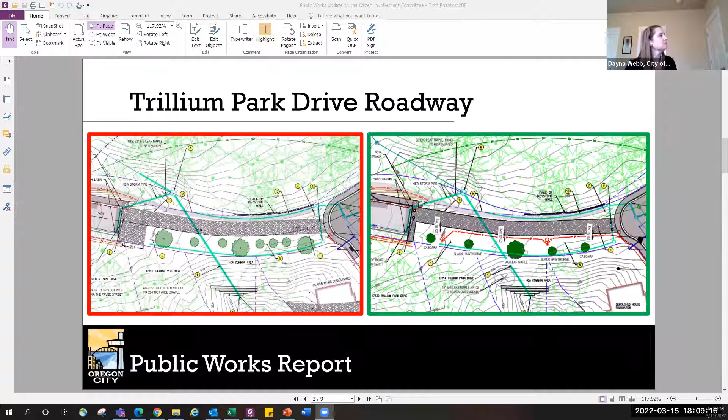From a visual perspective, on the left was the original drawing, and on the right is the updated one. You can see the street lighting here, trees pulled further back, so there's a more clear visual path so you can see what's out there. I'm summarizing - I haven't been the one working with the neighborhood on this, but I believe they had some concerns with dense shrubbery from a wildlife perspective, maybe coyotes in this area. So we're pulling those back, and this is the turnaround - just a little bit less dense on the plantings in that area. Again, trees pulled back behind the lighting. So just some small things, but I believe John has been working with the neighbors on these, getting to where everybody feels comfortable with this layout.

And that is all I have on Trillium.

Ray's got a question. Go ahead, Ray. I'm curious about the bollards I'm seeing in the pictures. Are they wide enough for a bike or a cargo bike to fit through there? What's the spacing for the bollards?

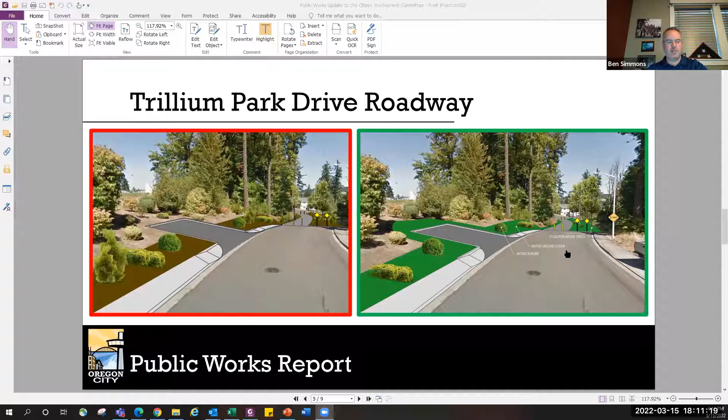All right, I think we're on to Frontier Parkway. Is that still you, Dayna, or is that somebody else presenting? That's going to be me. Dayna is more than welcome to chime in if I miss anything.

Folks, there's really not a lot to update. I'm going to share my screen real quick here. So myself and John Lewis met with Matt Dale.

Some of you might be familiar with Matt. He's attended a couple of the TAC meetings before on behalf of the neighborhood of Frontier Parkway in that area. Since he had last attended a TAC meeting, we were able to do some speed counts.

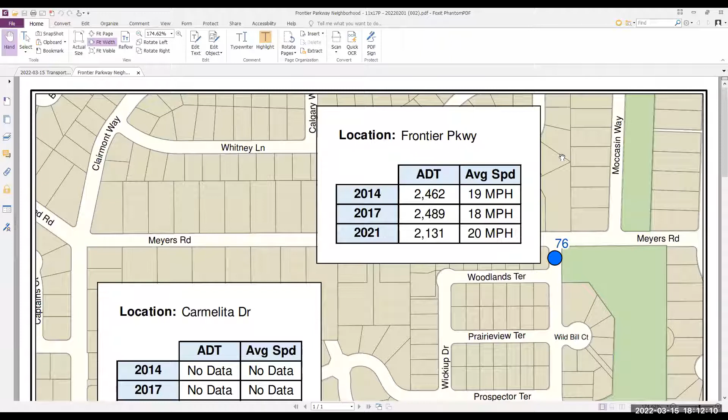Can everybody see my screen okay? So as you can see, here's Myers Road, and this is Frontier Parkway going north-south. Historically, what our data has shown, and currently as of 2021, there really does not seem to be a speeding problem through the majority of Frontier Parkway. Here you have one at Carmelita Drive, 22 miles an hour in 2021.

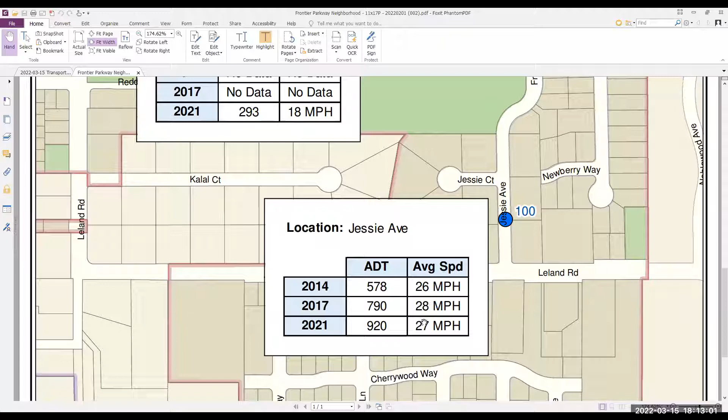If you go south to Silverfox, 18 miles an hour on Silverfox. And then the last data point we gathered was on Jessie Avenue. As you know, Jessie Avenue turns into Frontier Parkway, and right off Leland, we historically have seen speeds just a tick or two over the posted 25-mile-an-hour limit. So generally speaking, we're not seeing a speed issue based on our data.

John and I talked with Matt about different options. There's already speed humps on Frontier. We really collectively didn't think another speed hump would accomplish much. We talked about potentially doing some signage on Frontier at Myers and some signage on Frontier at Leland.

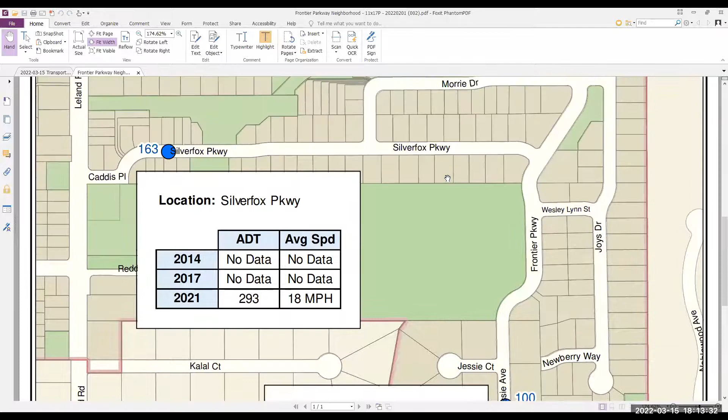We never did come to a determination on what the signage would say, other than potentially, no trucks allowed is one. But in this day and age, with most homes getting deliveries from Amazon and whatnot, we would want to make sure that we weren't putting out a message that those types of vehicles were not allowed to go there.

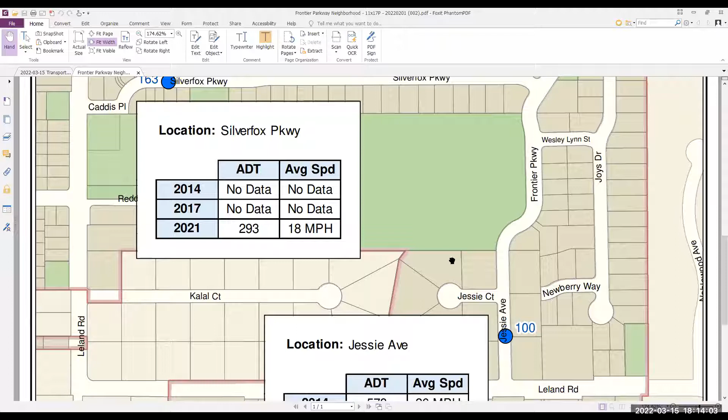We talked about potentially a sign that would say something to the effect of neighborhood traffic only. That's pretty easily done by Jason and his folks here at Oregon City. But frankly, in our discussion with John and Matt Dale, the effectiveness was in question. We just didn't really see where the signs probably would have that much effect.

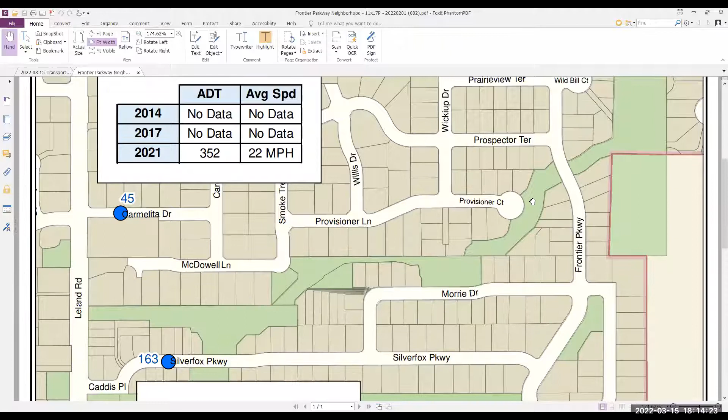John talked with Matt about doing some creative painting in the street. For example, there's a neighborhood, and Dayna and Jason will have to help me out on this, it's the McLaughlin neighborhood. The residents got together and painted an intersection. It's very colorful and kind of neat, and it sort of indicates that, hey, this is somebody's neighborhood.

John thought the thought process was, well, maybe if something like that was done by the neighborhood, it could help. Again, the effectiveness, there'd be no way to really gauge that until after it's done, and then it would be questionable at best. Vance, was the original complaint speeding, or was it trucks, or was it both?

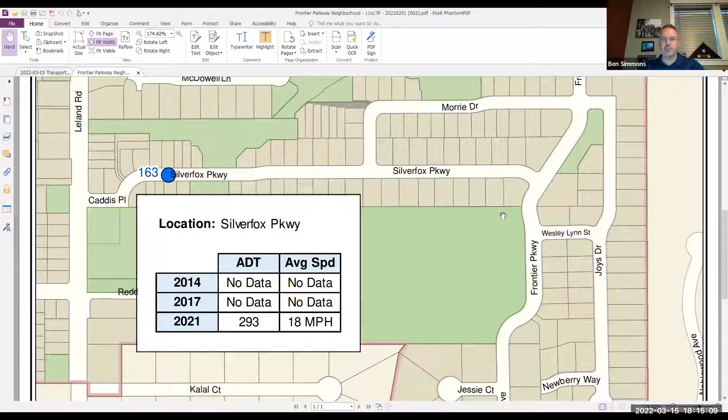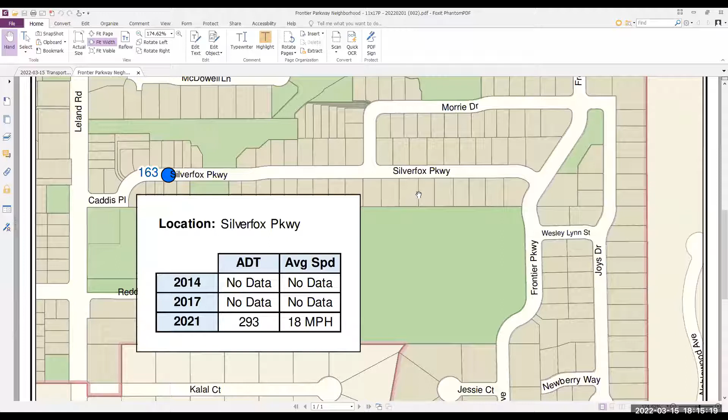I'm trying to go back to that meeting and I don't recall the nature of it. Yeah, Ben, as I recall, it was a combination of those things with the amount of vehicles traveling Frontier Parkway. Matt Dale indicated in a perfect world, the neighborhood surrounding Frontier Parkway would benefit if we closed Frontier Parkway south of the park. And as John told Matt Dale, we're not going to do that.

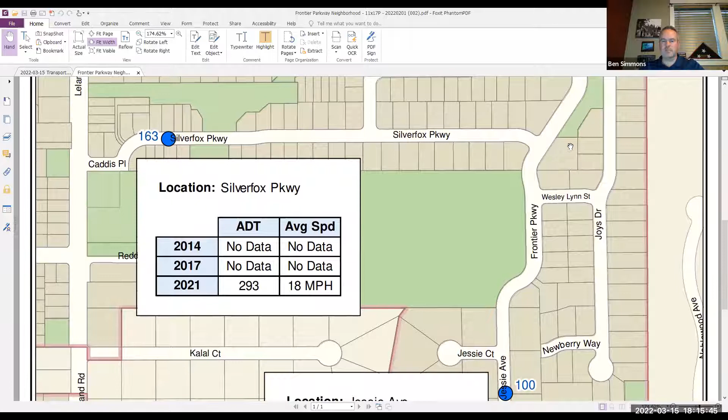Part of our traffic plan here at the city is connectivity, and this is a good connection. So I think generally speaking, Matt was okay with what John and I discussed and proposed.

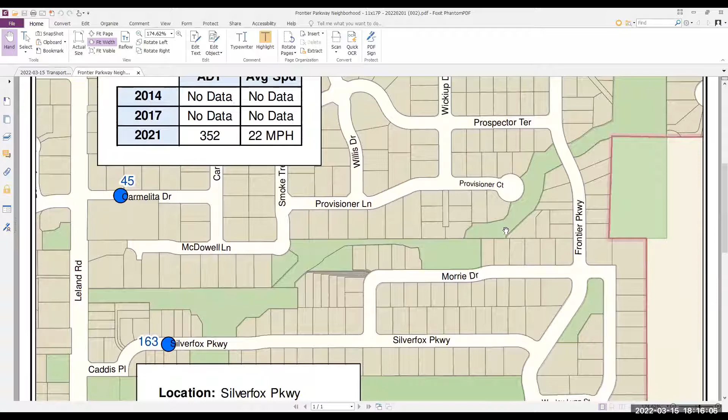Again, there was no concrete plan on what we need to do. There's just no good way to mitigate the traffic on Frontier Parkway. We've recognized it's not a speed issue. If I had to guess, potentially we could look at doing some signage. But we kind of kick this back to the neighborhood association for them to discuss and see what they want to do as the next step.

Yeah, that's correct. Matt was going to do that. So we will let you know if they reach back out to us, and if they do with their ideas and questions, we will absolutely run it by the TAC board.

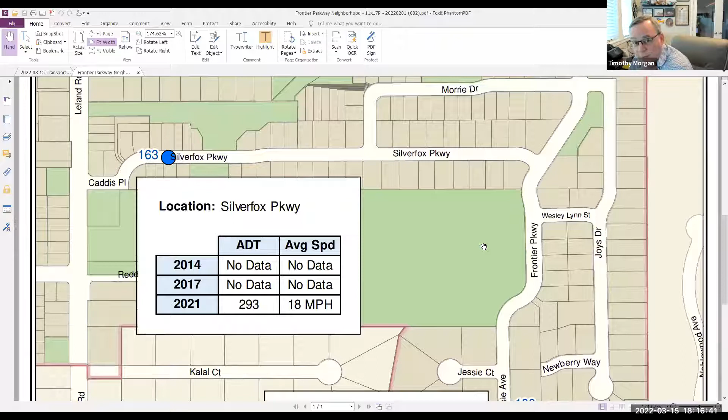So what if you put like a weight limit and say local deliveries accepted? Yeah, that could be one of the options, Tim, for sure. If we do a no-trucks type of sign, we'd put a weight limit on there. I don't know that we have those signs here in town. Typically those weight limit signs are in conjunction with small bridges. But that's something that myself, John, and Dana would have to vet out and see what is appropriate to put there, and what the message is and if it'll be effective.

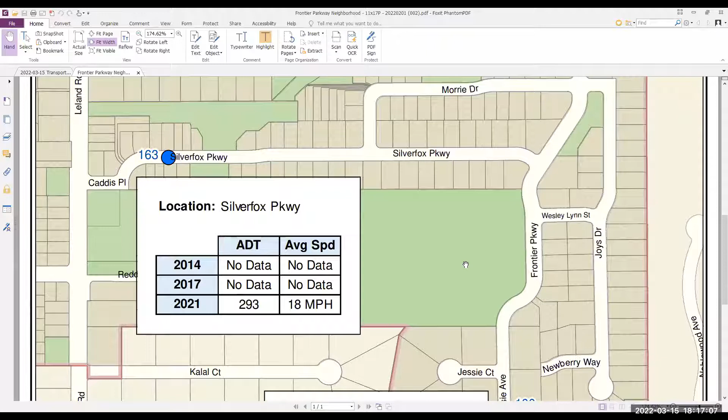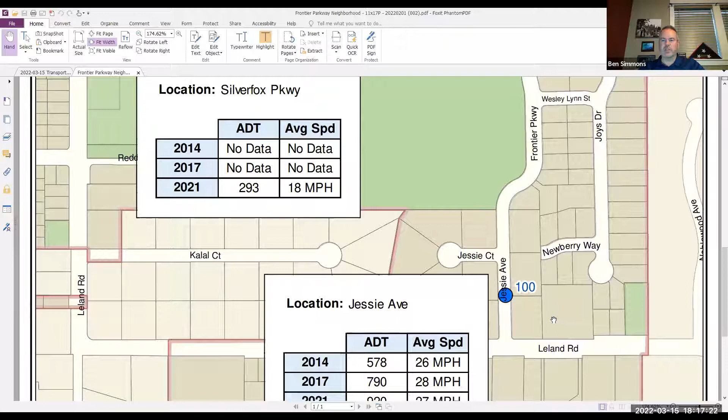Yeah, because that's the thing. If you put a weight limit, say no vehicles over 20,000 pounds except for delivery, that would give everybody the idea that this is not a thoroughfare. Correct. What's the relative cost of throwing one of those up at each end? I got to assume fairly inexpensive. Yeah, that's correct, Tim. Not very expensive at all.

Okay. I can't really see anybody, so I'm going to stop screen sharing. Does anybody have any other questions or input on this?

If Vance, that mural you're talking about is at 11th and Jefferson. If the group wants to see a picture of it, I can share a picture of it. Yeah, let me make you a co-host real quick, and you can bring that up, Jason. It is kind of neat. Jason, you are now co-host. You should be able to share screen.

So Jason, are you next for the paving report? Is that number agenda item 3? Is that yours? Yeah, that's me. The PMUF report thing. Yep. Okay, let's see, I'm just going to go back to the share here real quick if I can figure out which screen I want to share. And PMUF report thing is a technical term, guys. Yeah, I called it the paving thing or paving report.

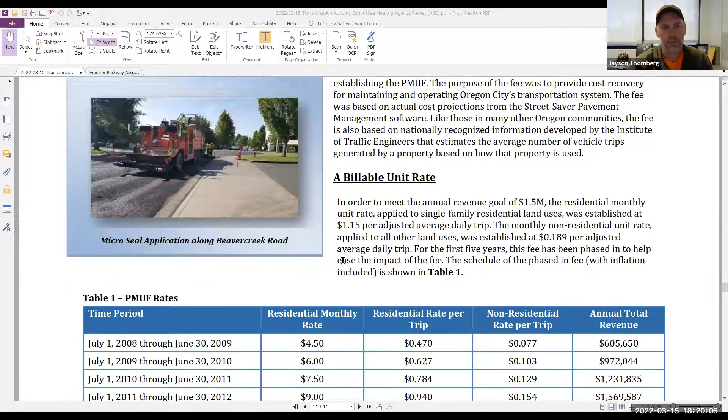You can keep going. Let's see. Yeah, the billable rate goes up by a percentage. I'm not sure what it is, but it goes up. You can see how it climbs every year. That's through 2017. Go to the next page. Yeah, through 2020, I guess. We don't have the 2021 info in there. Or no, it's through June 2021. Yeah, okay, correct.

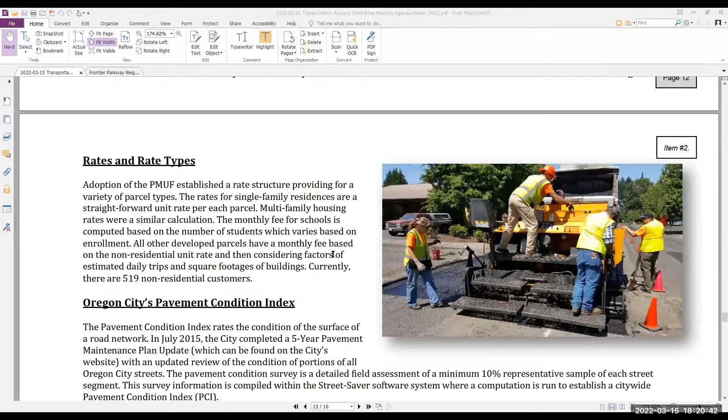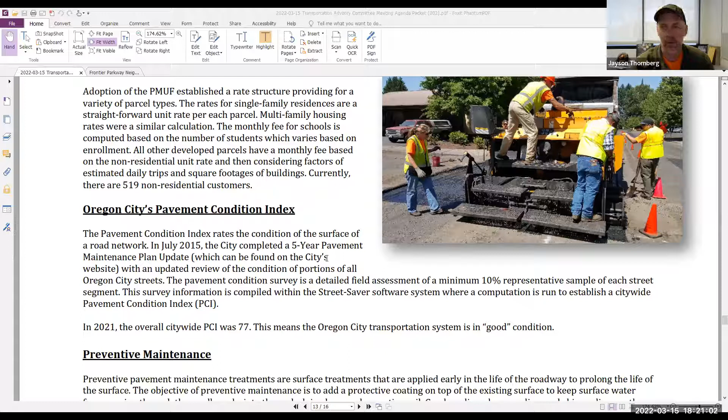And if you get on the city website and search PMUF, this rate information is on the website. Then our PCI right now is a 77. It was a 63 back in 2008 when the plan started. So to give you an idea, 84 is what they talk about when you go to classes, and 84 is about as high as you could ever get. So we're in what's called a good condition, but we're at the top of the good condition right now.

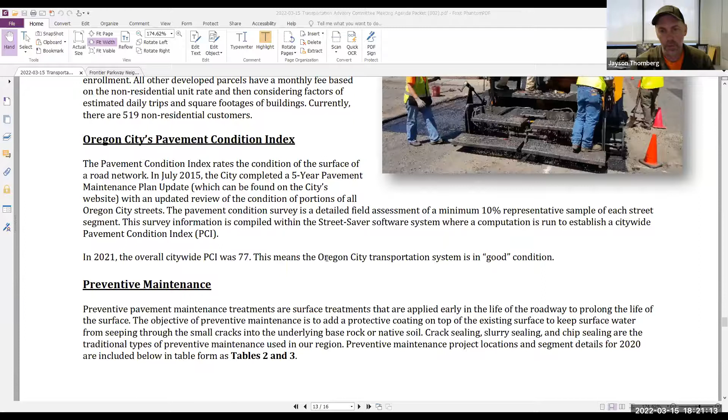So let's keep going a little bit more. Here's the slurry seal list from 2021. Came out to $1.94 a square yard. We did all of these streets - those are the starts and stops. 72,000 square yards total for $140,000.

I missed getting a couple of pages into this report. Kim has updated the report on the website and said she was going to try to send it to you guys - not sure if you got it. She did right before the meeting. But it has the chip seal on it. We did 43,000 square yards of chip seal on Warner Parrott and South End Road for right at $160,000.

The numbers this year, the quantity is going to be roughly the same, but the price is going to go up quite a bit with the price of oil. And then the contractor last year, when he bid, he forgot to add his rock, so we got the rock for free last year. We won't get that price again.

And then it has the contracted street for the reconstruction that we did. Looks like we did, yeah, 3, 6, about 9 streets for $1.94 million. Almost $2 million was the paving project last year, which isn't in this particular one, but it's in the one that's on the website now.

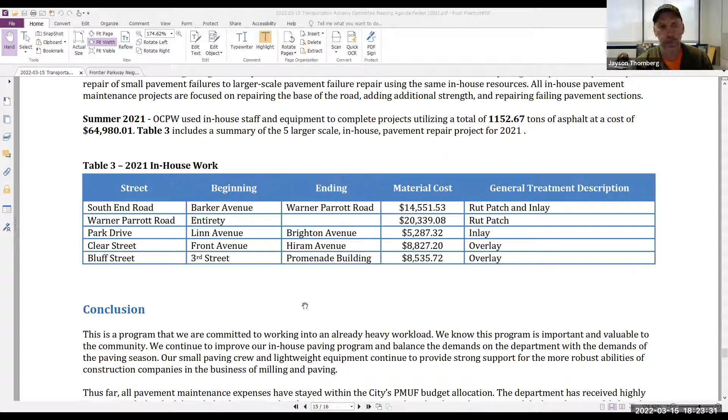So I think somebody have a question? We did—

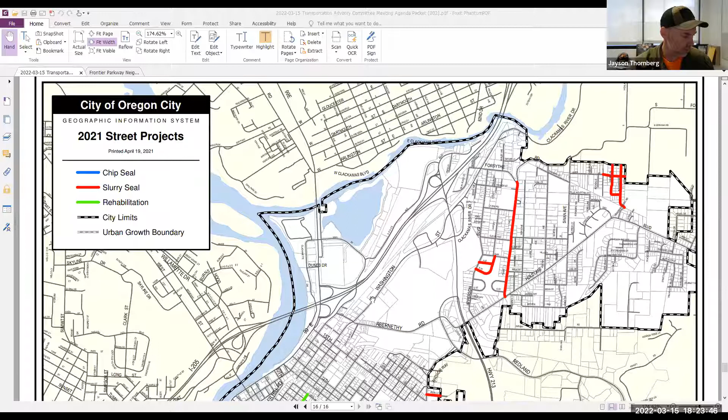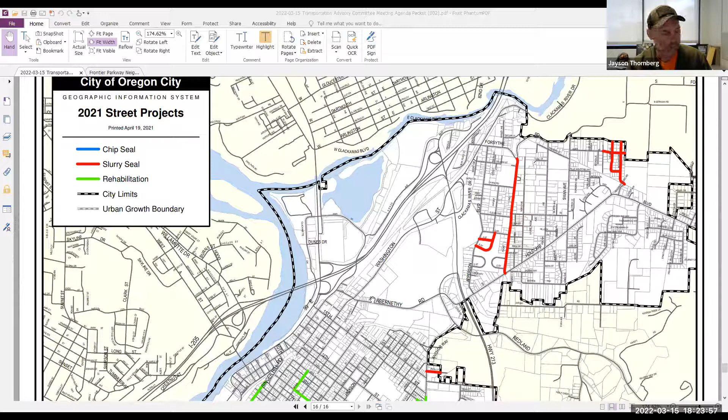It's not in the crack seal report or the paving report, but we put down crack seal every year. We did 27,600 pounds of crack seal on 17 3/4 lane miles - so not center line, but just actual lane miles. So we've made a decent footprint with the crack sealing also.

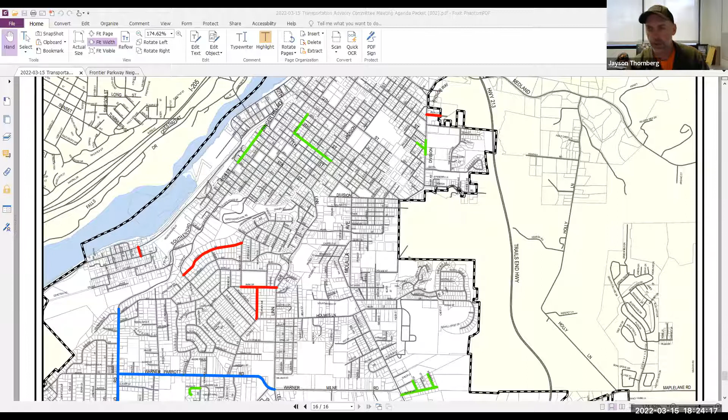And then going into 2022 - does anybody have any questions on the 2021 before I move on to 2022? What's the difference between the chip seal and the slurry seal?

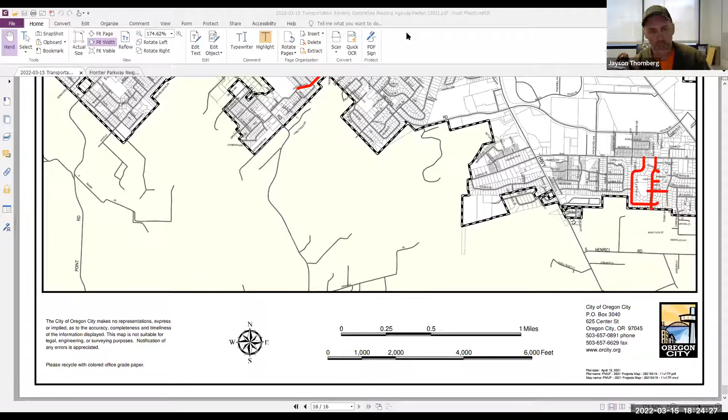So the chip seal is like an actual rock aggregate. We use a 3/8 number 8 rock. It's like the county chip seals with a 1/2 inch rock - we go a little smaller than that, we do a 3/8 number 8. And the chip seal, they shoot the oil on the ground, then put the rock into that oil, roll it in, and then put a fog coat over the top of it the next day after they sweep up the extra aggregate.

So it has that rock in it. We use that more on like South End Road, Warner Parrott - it's more for higher traffic, heavier traffic going faster. And the slurry seals, it's more of a sand that's mixed in the truck with oil, water, sand, some cement. And then they just squeegee it out behind their truck with just a drag box. That's more of a neighborhood scenario versus the others, more of the thoroughfares.

Yeah, it's kind of almost like just a rejuvenator. It's only maybe a 1/4 inch thick. We'll get in there and crack seal and then put that down, and it's supposed to give about 8 years more life extension onto the life of the road. Thank you.

And then 2022, we're looking at about the same numbers. We're looking at 80,000 square yards of slurry seal. That's already come back from bid - that came out at $161,500. Last year, the all-in price with traffic control and mobilization was $1.94. This year, it's $2.02, so we didn't see not much of an increase this year.

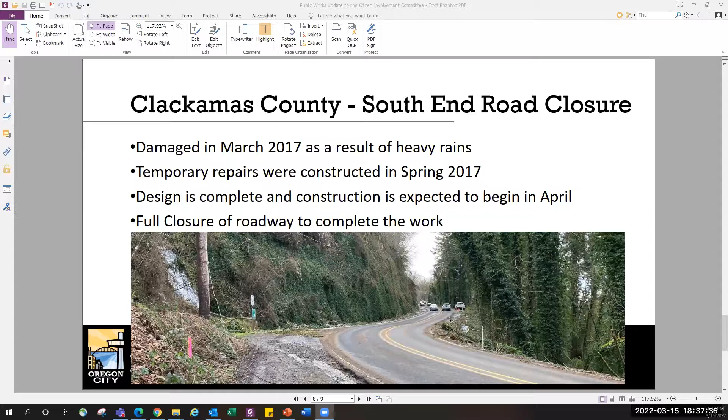High Street is all done. We have a small pavement repair project on Center Street, but we will be postponing that a year. Okay, I think that's what I was thinking of. I just want to make sure we didn't add to the problem by coordinating something else in the area. All right, does anybody else have questions on this particular topic?

Vance, do we have any communications or future agenda items that have been relayed to you?

No communication items. The only future agenda item I have, other than Dana mentioning the county is going to come speak to you folks in April, is we were reached out to with a question from a resident that wants to explore putting flashing school zone beacons on South End Road at John McLoughlin School. Currently the signage there, I believe, is just a static sign on each end of the school zone. As I recall it says speed 20, and I'm not sure if it's 7 to 5 or when children are present. I think it's 20 miles an hour, 7 to 5.

There is a crosswalk right there in front of the school that is a signalized intersection for that crosswalk. When I first got the info it was pretty vague, so I was wondering if they were wanting an RRFB put in, but I believe they're wanting more of the school flashing beacons to flash at certain times of the day. The person that made that initial contact with me has not reached back out.

So I don't have any more details, but hopefully they will. That's something staff will discuss, see if it's in anybody's project folders or on somebody's radar, better way to put it. Then we'll be able to have at least some dialogue with that person if they so choose at the April meeting. Does anybody else have anything they want to add to the agenda for next month?